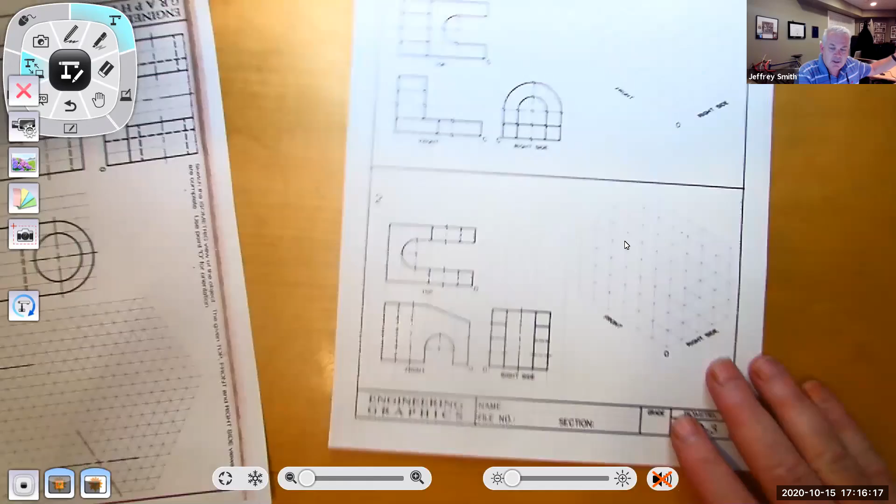First thing I want to do is read the instructions so I don't get myself too carried away. Sketch the isometric view given the object, point O for orientation. Pretty self-explanatory, we've been doing this all along.

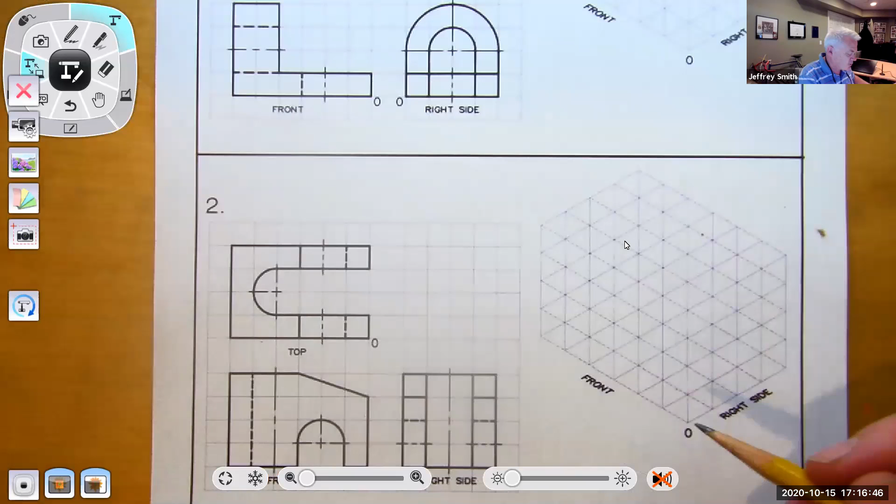Looking at this, I always try to figure out what I'm looking at before I start. So one thing I'll do, and sometimes ask my students to do, is before you start going hog wild, just doodle what you think you see. It's not going to be to scale, but I'd like you to do that right now.

Go ahead and doodle this object. For me, I look at the top here - it's got this big cutout, and the back looks pretty consistent. So I think it does something like this. When I doodle, I don't have to worry about the 30 degrees, since remember these are all 30 degrees.

I think I'd come out here and make this little tunnel like that, come down, come up. This isn't perfect, just a quick sketch. Then it does something like this, a little not quite to proportion. Then up, back, and then it actually rotates - comes down, goes like that. So I think it looks something like this.

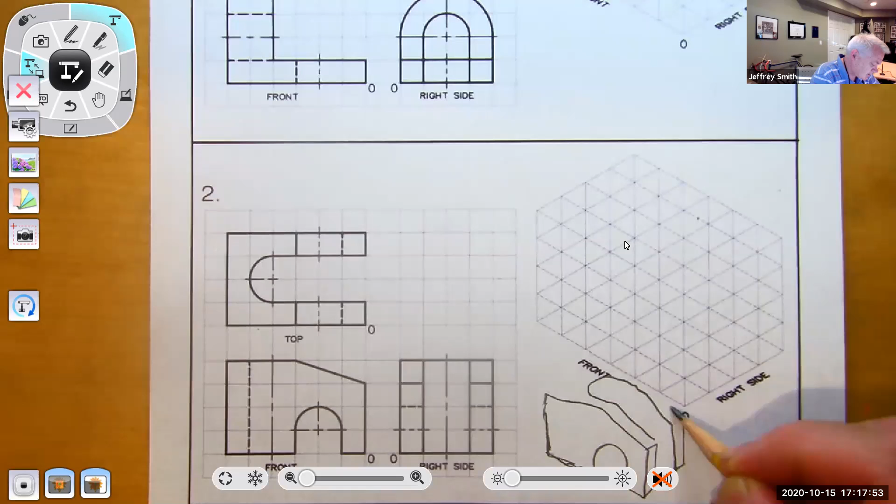Then it's got another piece, something like that. Cool, so I think that's what it's going to look like.

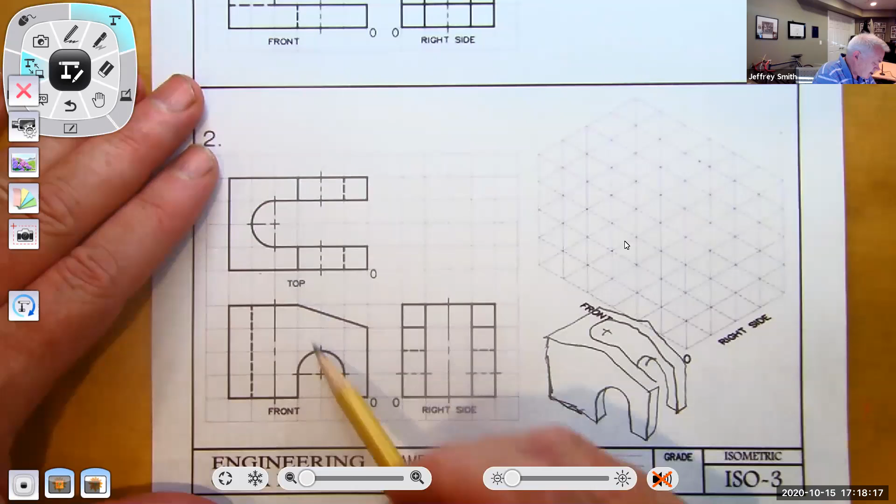Knowing that, I can go in here and say, alright, I see this flat area right here on top. I generally just work with what it gives me.

So just to make this a little cleaner, I'll use a ruler or straight edge. Let's do this backside. There's no right or wrong way to start, but generally 1, 2, 3, 4 - just make sure the box is the same size. That helps me.

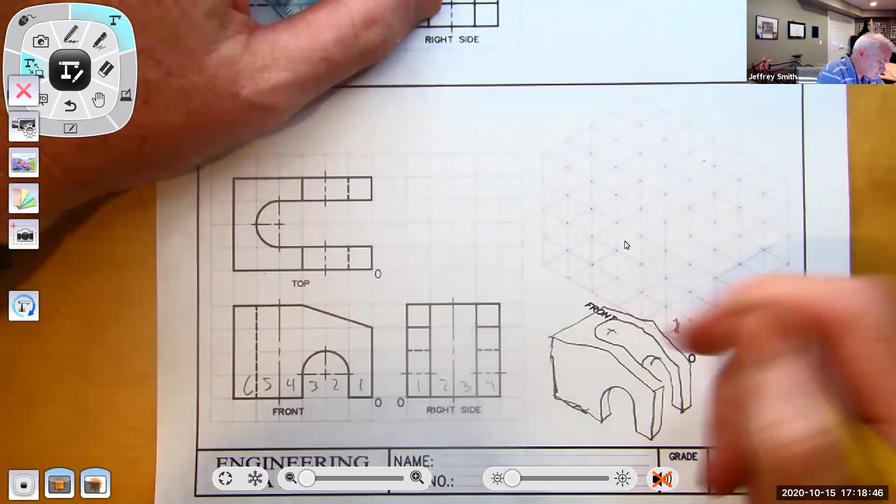And then it's 1, 2, 3, 4 up. So I have a sense of where this box is. Now let's start drawing this in.

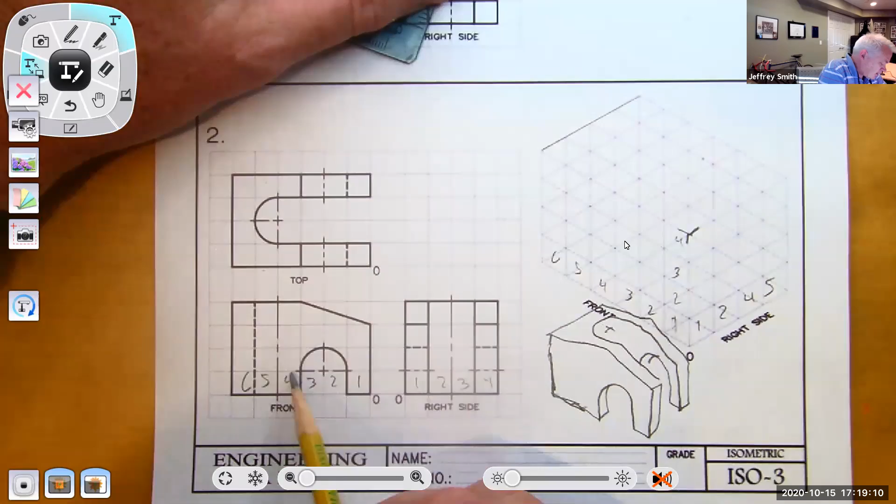I'm going to go with this top first since I'm going with what it gives me first. So it's 3 back, that would be there.

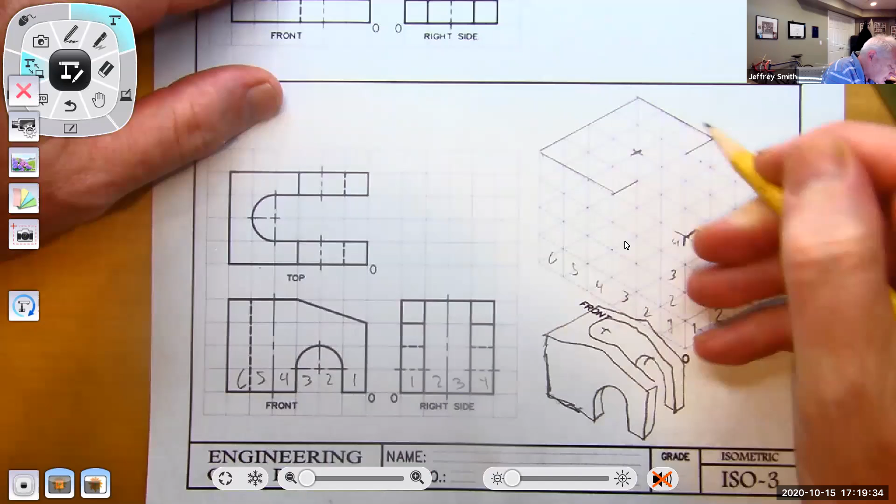So that's that flat spot. I know there's a circle - I count 1, 2 in. It's right there, extends a little bit beyond here.

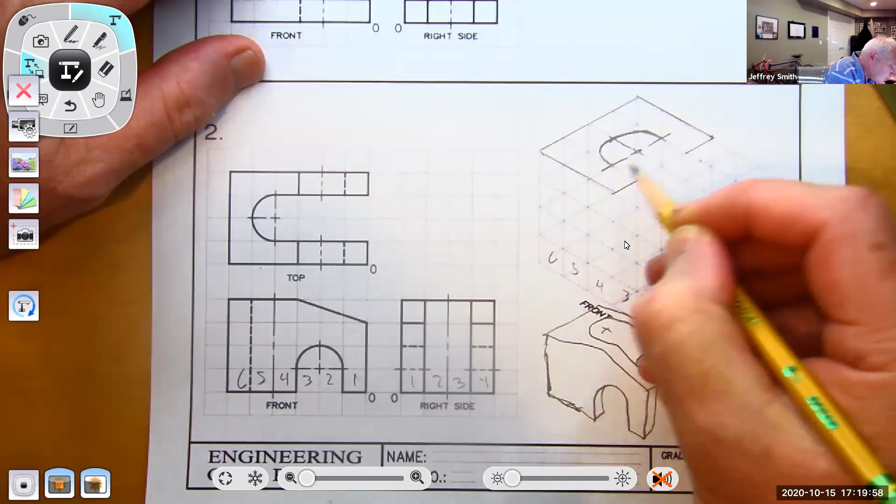So this extends like so. I'm going a little faster than you should. Alright, so that's that.

For the back here, let's work on the front view. I've got the top, I know there's a weird angle here, but I'm not even going to bother figuring that out yet - I'm just going to first work with what it gives me.

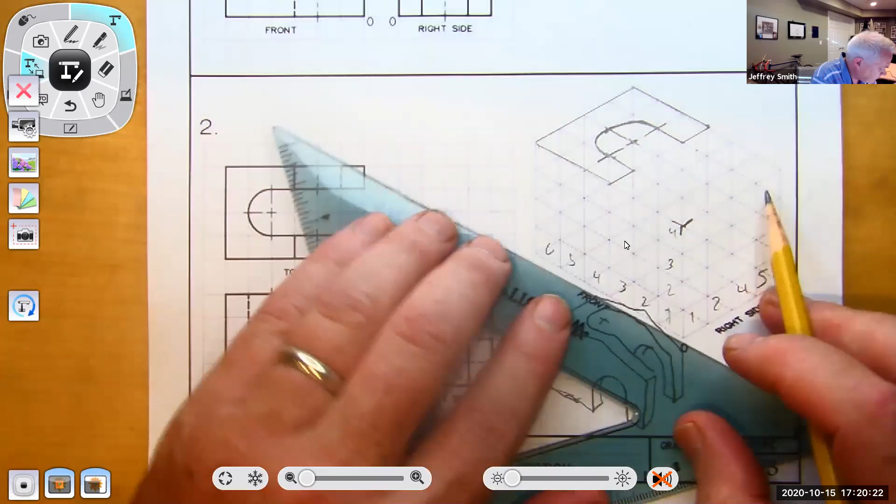So let's do this, what's called the front view here. This goes all the way, with a little gap here. So go 1, gap of 2 - let me just erase my little doodle there. Gap of 2, and it goes all the way up. Okay, that looks good, it goes up 3.

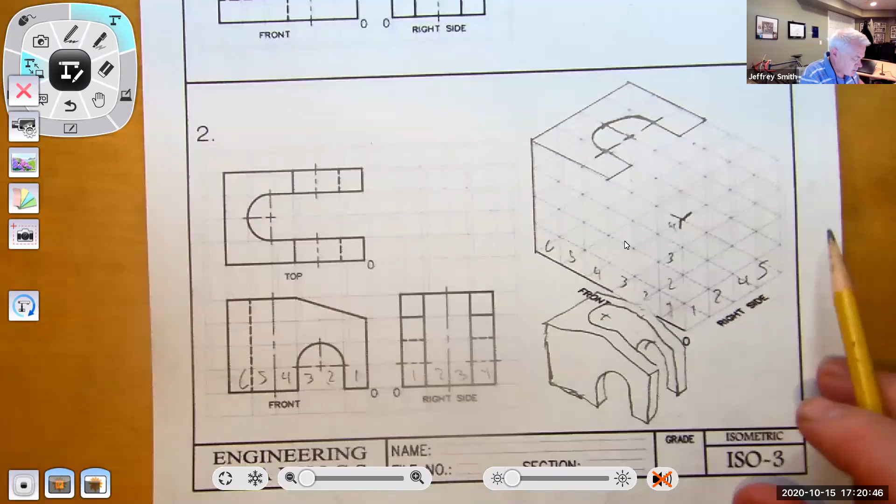2, 3, then it stops, and then it joins up right there. I'm not going to try to figure that out - I'm just going to trust that I drew that correctly. Join that there.

Very similar to that circle - it's up here, 1, between 2 and 3. So draw that, extend that beyond.

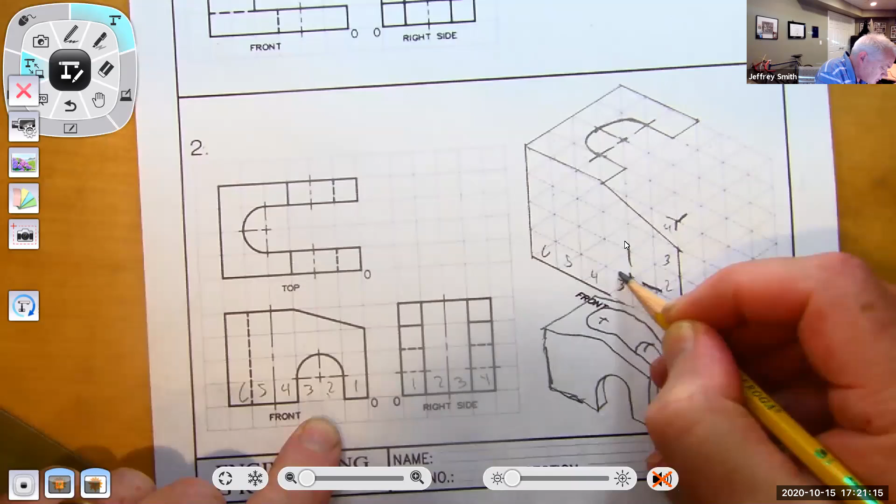And it comes straight up, and then I'm going to draw that circle. Remember, it really hangs up a lot there, so you've got to be cognizant of that.

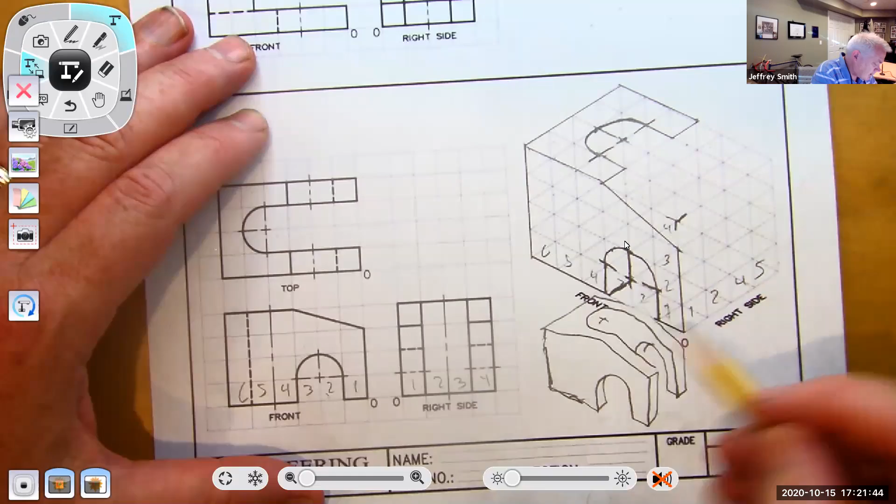Looks good. I know it's got some depth here just from the top view, so I'm going to kick this line back. And it's actually solid, so that's okay - solid like that, 1 over. Alright, I think I got this.

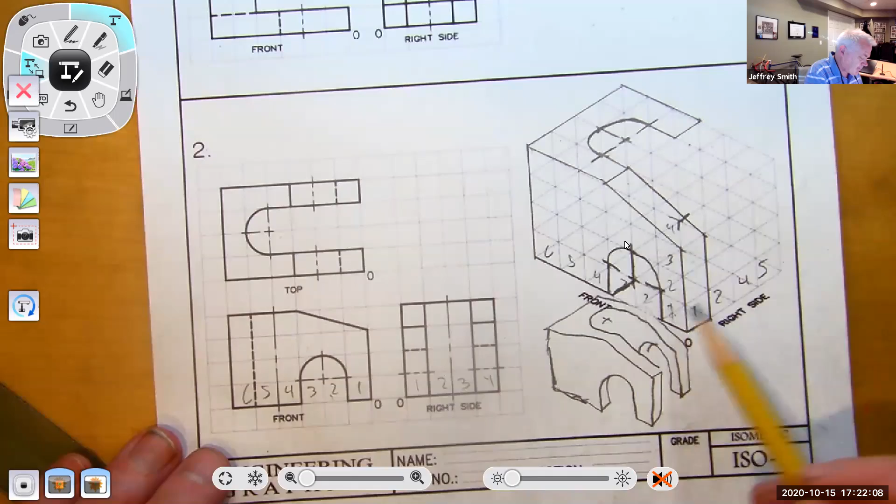I think all I have to do is make the same object from my little sketch on this side. So far so good - that hidden line is right there, but I'm not going to show that. So let's just make another one.

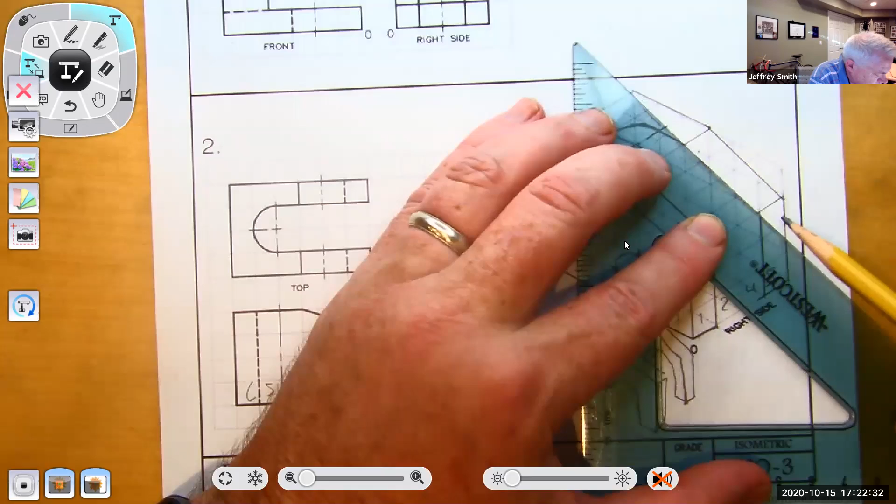Oops, went too high - alright, go back. And then this goes back 1, if I'm just going to copy this, and goes up 1, and it's the same curve.

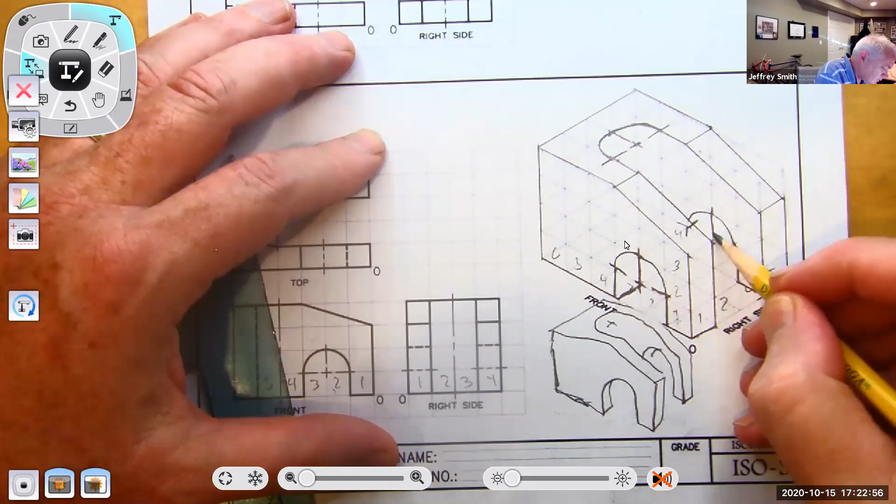Okay, so I think that's everything on this one. Is there anything I'm missing? Center line - alright, center line there. Don't need the hidden line here. I think that is everything.

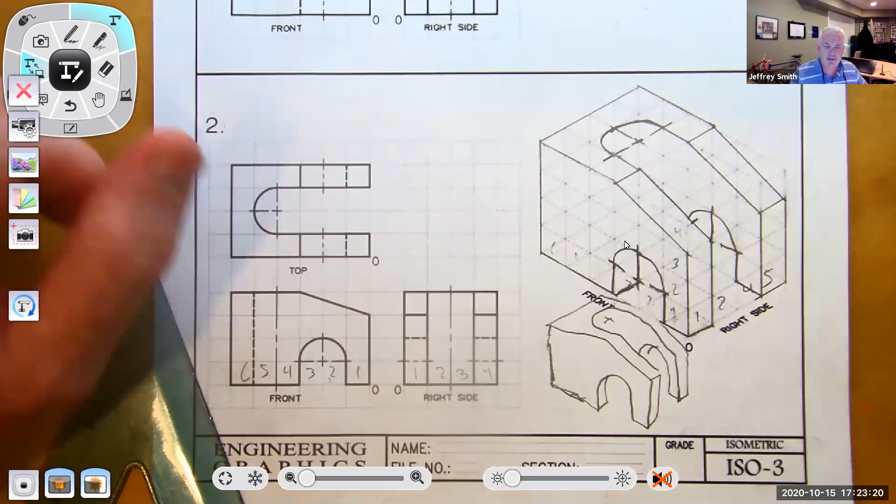So Susie or Bill, am I missing anybody? Anybody in the audience want to give me a yay or a nay? I may as well erase my little doodle because that's not going to help me here.

Yeah, that's good, I think I'm doing okay here. I think I've basically got it.

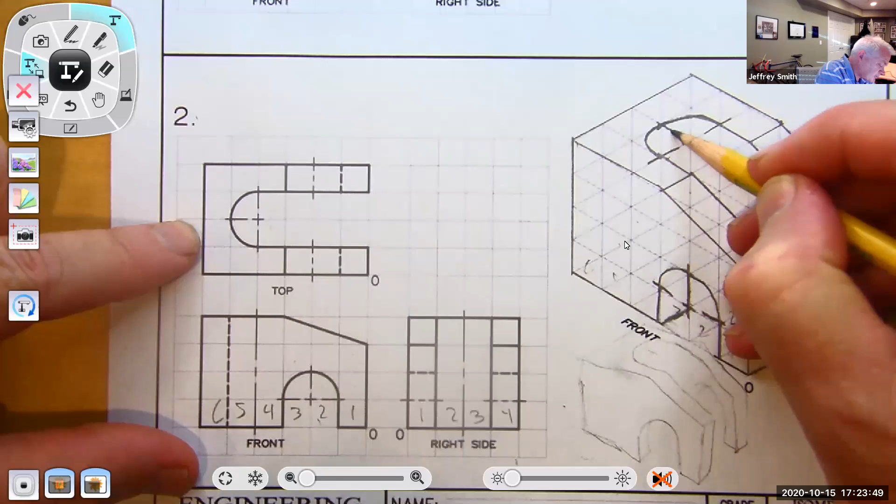Again, your center lines, you want to make sure you're extending beyond. I don't need to draw the line going up in this scenario, going through - this would suffice. I don't need to draw that long line. This is the traditional way you would do it from the top view, so I don't need to draw that. I think I have all the lines that I need.

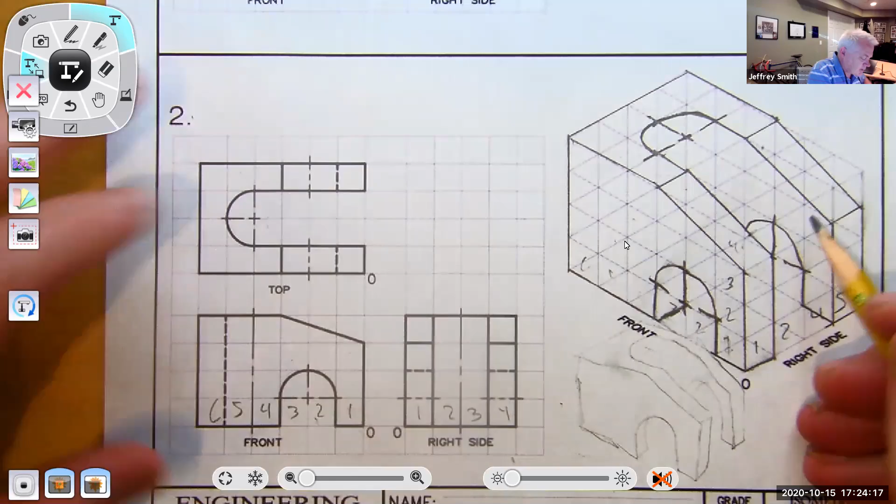You know what, maybe there's just one line more back there - is there? Yeah, well right there's a line right here. Is this the one you were thinking? Okay, and beyond that, I think we're good.